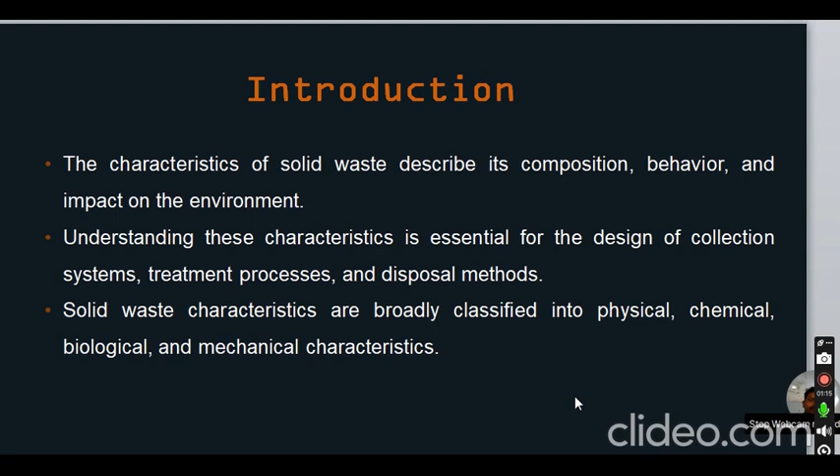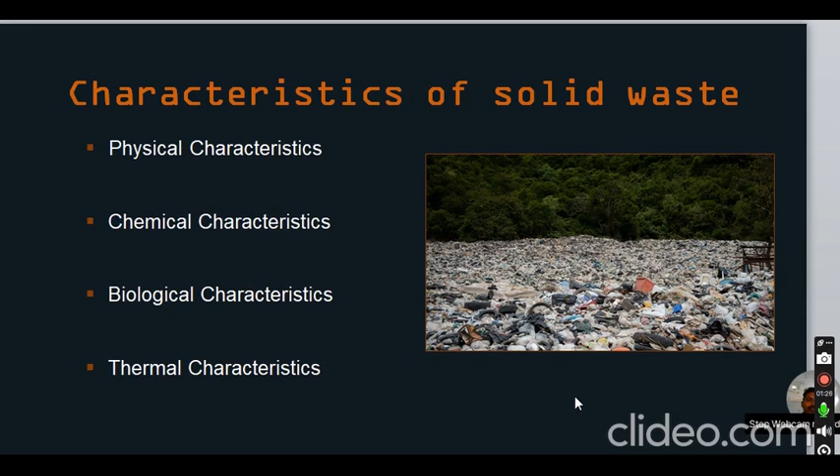So here the characteristics of the solid waste. Characteristics of the solid waste describe its composition, behavior and impact on the environment. Understanding those characteristics is essential for the design of collection systems, treatment processes and disposal methods. Solid waste characteristics are broadly classified into physical, chemical, biological and thermal or mechanical characteristics. These are the characteristics of the solid waste: physical, chemical, biological and thermal.

So in that, the first one is the physical characteristics. It is important for the selection and operation of the equipment and for the analysis and design of the disposal facilities. It includes the following specifications like specific weight, moisture content, size of the waste constituents, field capacity, and permeability of the compacted waste.

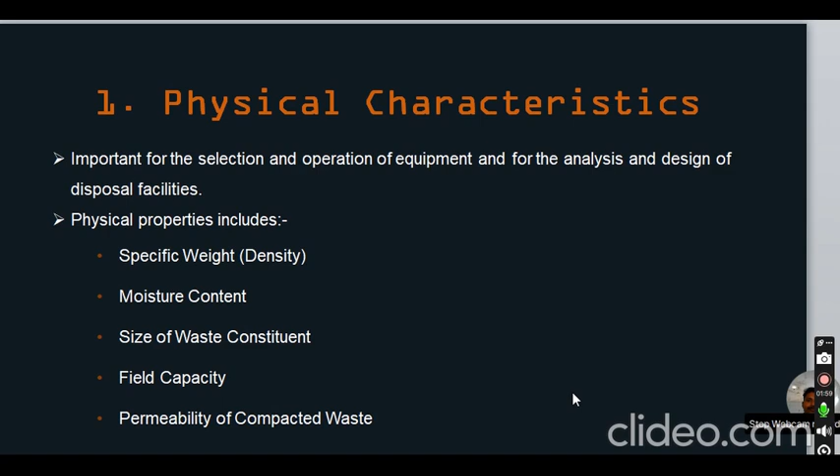The first specification is the specific weight. Specific weight is nothing but density. What is the definition of density? Density is defined as the mass of the substance to the volume of the substance. So specific weight is defined as the weight of the material per unit volume, and the unit is kilogram per meter cube. Usually it refers to the uncompacted waste. Specific weight varies with the geographical locations, season of the year and length of the time in storage.

The specific weight of any substance varies with the geographical locations, meaning different geographical locations like on the earth, on Mars and on the moon. And with seasons of the year, the specific weight varies, meaning the waste decays. For example, the waste disposed on the land means landfill. For example, over 100 years of landfilling, the specific weight of that waste varies, and also with the length of the time in storage. Any normal compaction equipment can reduce the volume of the waste by 75%. Here compaction uses different types of rollers to compact the waste materials.

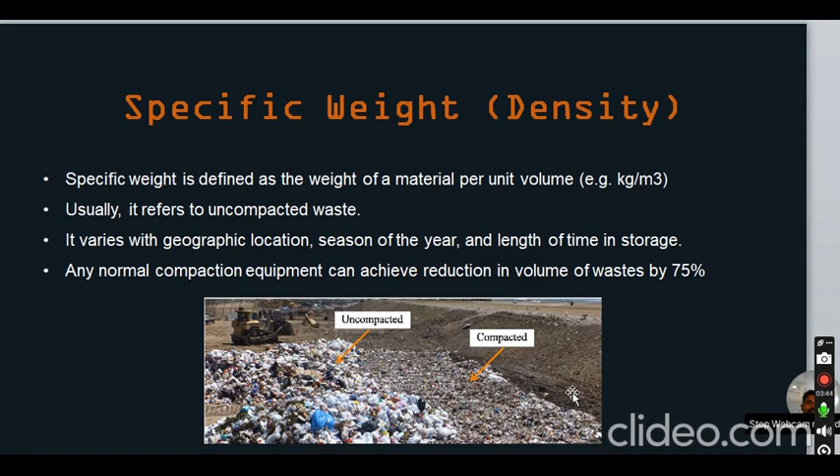The typical specific weight values: here the table explains the range and the typical values of the different components of the solid waste. Here the components mean food waste, paper, plastic, yard waste, glass, tin cans, aluminium, etc. The second column represents the range, and the third column represents the typical values. The first one is food waste. The specific weight range is 130 to 480 kg per meter cube, and the typical value is 290 kg per meter cube.

The second one is paper. The paper specific weight range is 40 to 130 kg per meter cube, and the typical value is 89 kg per meter cube. The next component is plastic. The specific weight range is 40 to 130 kg per meter cube, and the typical value is 64 kg per meter cube. The next component is yard waste. The specific weight range is 65 to 225 kg per meter cube, and the typical value is 100 kg per meter cube.

The next component is glass. The specific weight range is 160 to 480 kg per meter cube, and the typical value is 194. Then the next one is tin cans. The specific weight range is 50 to 160 kg per meter cube, and the typical value is 89 kg per meter cube. And aluminium specific weight range is 65 to 240 kg per meter cube, and the typical value is 160 kg per meter cube. These are the specific weight ranges.

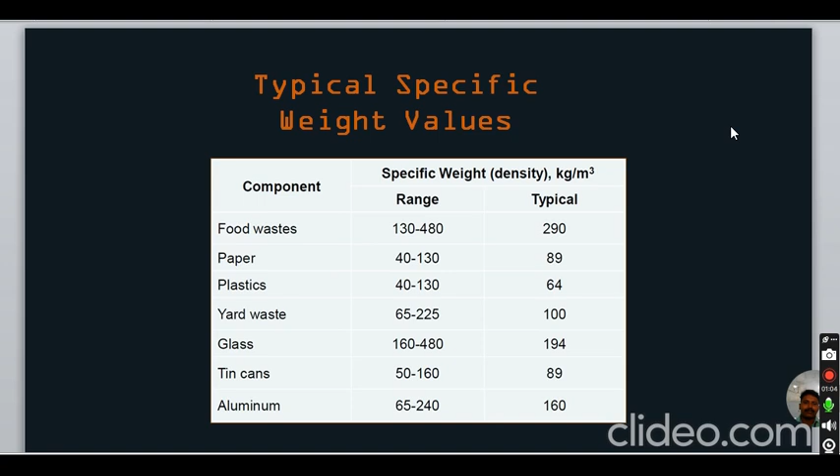The next one in the physical characteristics is the moisture content. The moisture in a sample is expressed as a percentage of the wet weight of the MSW material. MSW means municipal solid waste. A typical range of the moisture content is 20 to 40%, representing the extremes of the waste in an arid climate, meaning low rainfall, low precipitation areas, and in the wet season of a region of high precipitation.

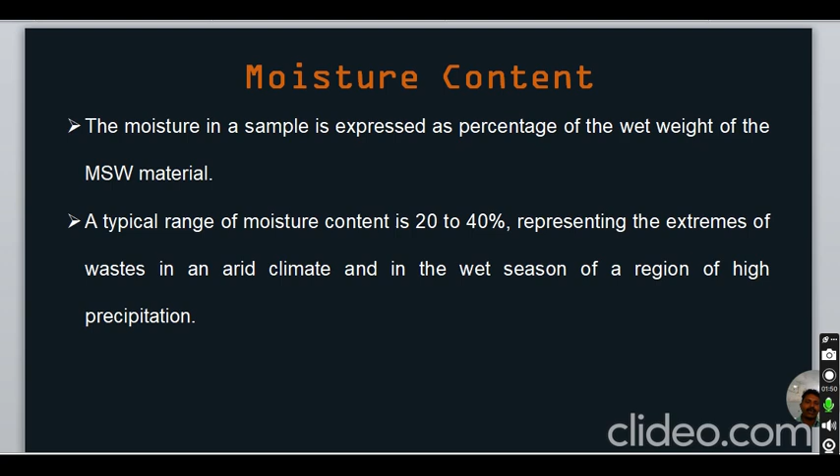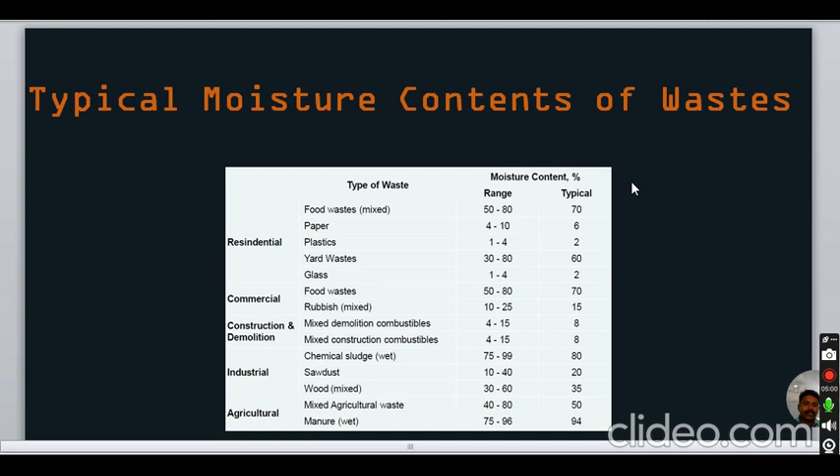And industrial waste like sawdust: moisture content range is 10 to 40%, and typical value is 20%. Next one, wood: the moisture content range is 30 to 60 and typical value is 35. Mixed agriculture waste: the moisture content range is 40 to 80%, and the typical moisture content is 50%. And agricultural waste like manure, wet form: the moisture content range is 75 to 96, and typical is 94%.

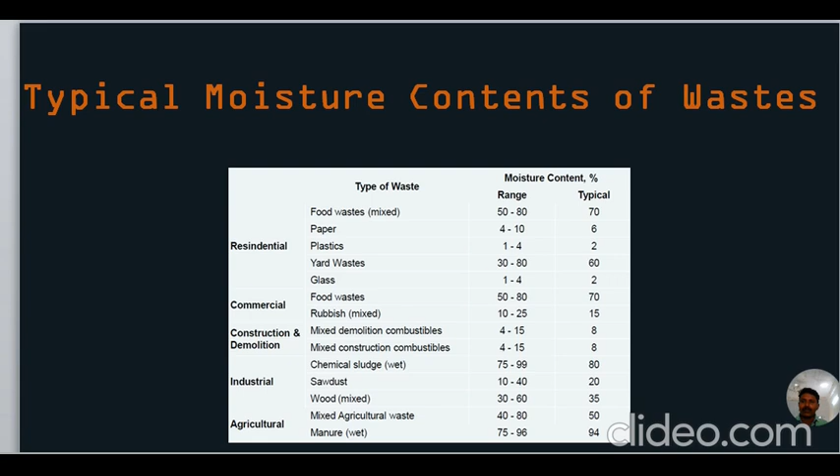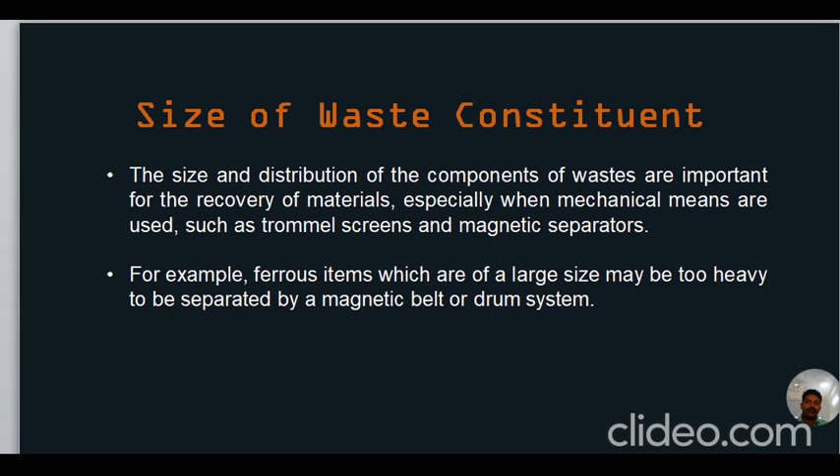Next one is the size of the waste. Size of the waste constituents means this characteristic helps distribution and transportation of the waste easily. The size and distribution of the components of the waste are important for the recovery of materials, especially when mechanical means are used, such as trommel screens and magnetic separators. For example, ferrous items of large size may be too heavy to be separated by the magnetic belt or drum system.

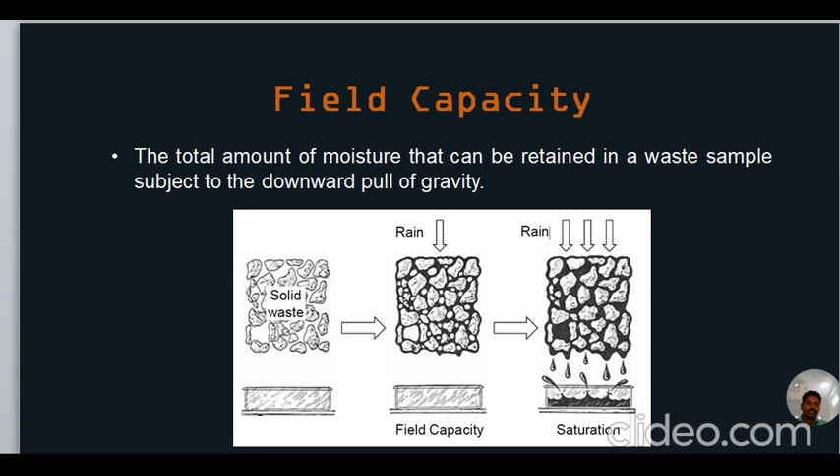The next characteristic is the field capacity. It means the total amount of moisture that can be retained in a waste sample subjected to the downward pull of gravity. The solid waste material consists of phases and it retains some water or moisture content. It slowly falls down due to gravitational force. Field capacity is critically important in determining the formation of leachate in landfill.

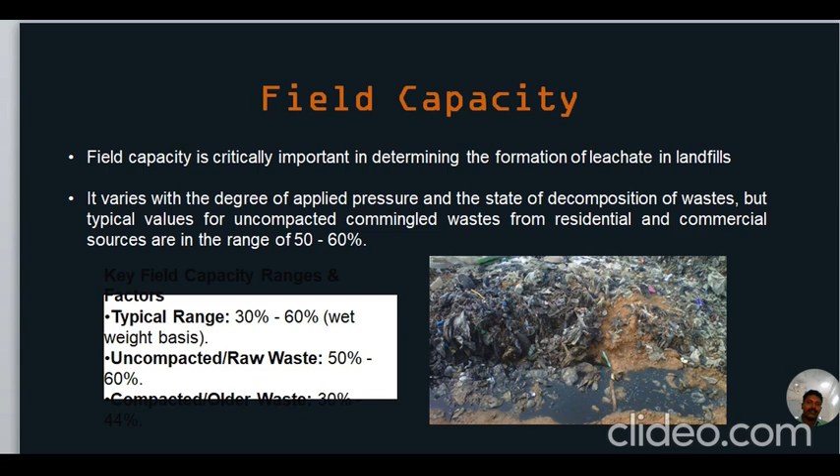Here leachate means a liquid that forms from the solid waste in the landfill. In rainy seasons the rainwater passes through the solid waste, which contains some chemicals. That liquid with the chemicals is called leachate. Field capacity varies with the degree of applied pressure and the state of decomposition of the waste. But the typical value for uncompacted commingled waste from residential and commercial sources is in the range of 50 to 60%.

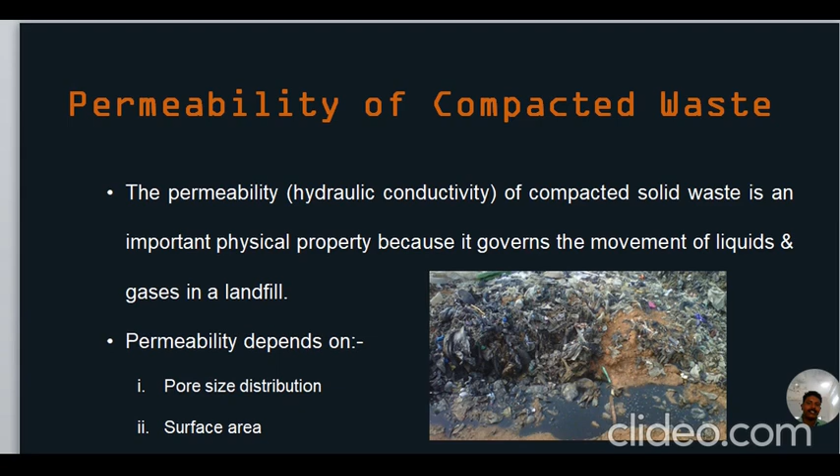The next characteristic is the permeability of the compacted waste. The permeability, or hydraulic conductivity, denoted K, of compacted solid waste is an important physical property because it governs the movement of liquids and gases in the landfill. The permeability depends upon the pore size distribution and surface area. Permeability means, for example, a substance allows water to pass through it. It depends upon the pore size distribution and surface area.

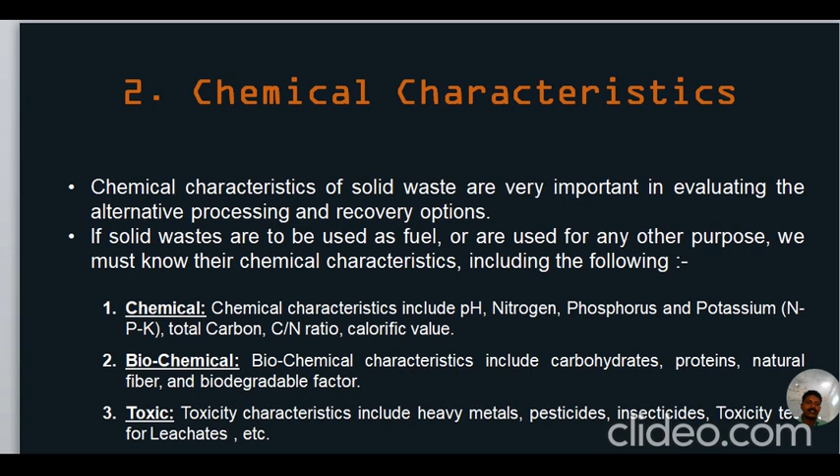The chemical characteristics include pH value, nitrogen, phosphorus and potassium, total carbon, C/N ratio, meaning the carbon to nitrogen ratio, and calorific value. Biochemical characteristics include carbohydrates, proteins, natural fiber and biodegradable factors. And toxic characteristics include heavy metals, pesticides, insecticides, toxicity for leachates, etc.

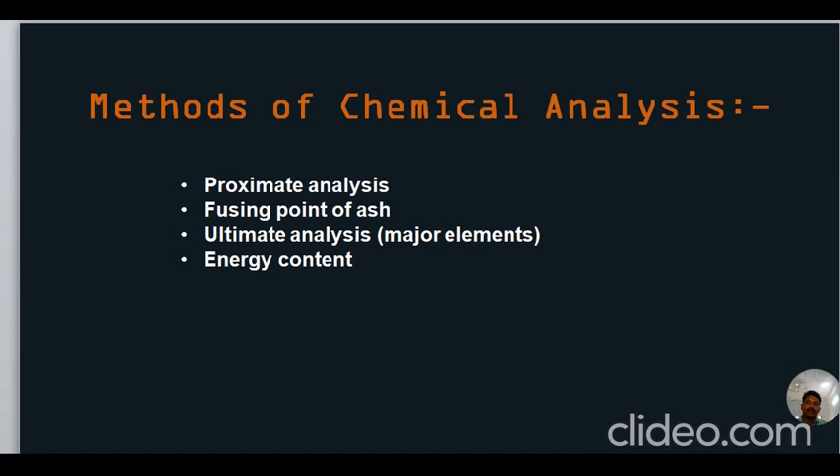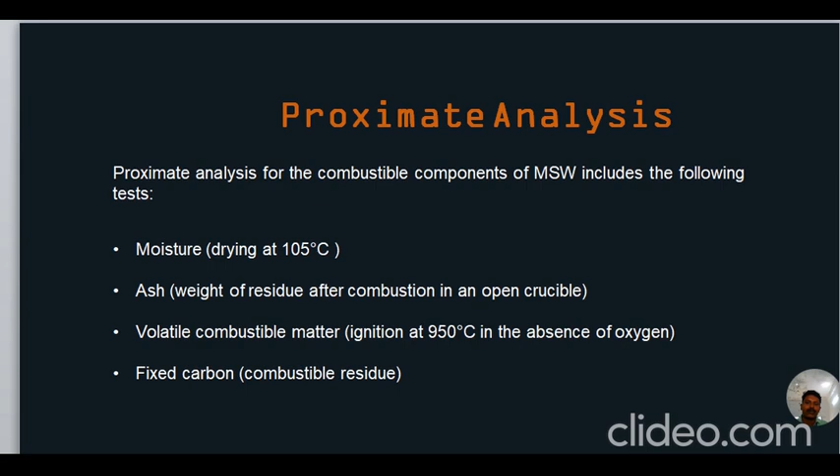Methods of chemical analysis. The following methods are used for chemical analysis: proximate analysis, fusing point of ash, ultimate analysis of major elements, and energy content. First one is the proximate analysis. Proximate analysis for the combustible components of municipal solid waste includes the following tests: moisture content, ash, volatile combustible matter, fixed carbon, combustible residues.